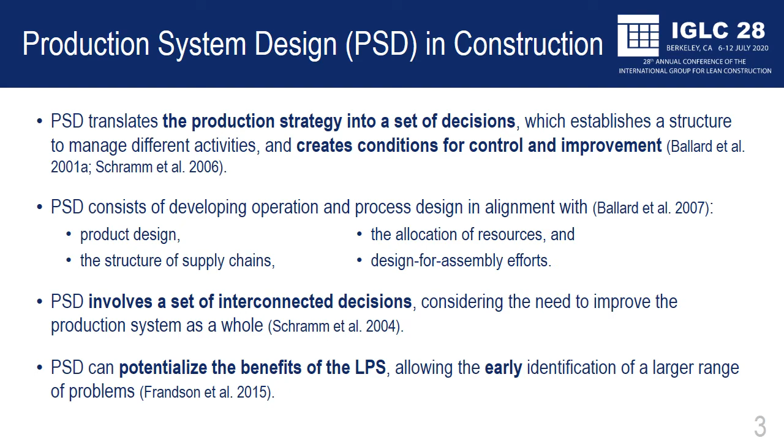This paper reports the experience of a construction company that has implemented production system design and the Last Planner System over 3 years. This work is part of an ongoing lean implementation program. The contributions of the paper are the definition of the scope and the potential benefits of the production system design, and the proposition of a set of practices that can be used along the production system design stages, with emphasis on location-based planning and control.

So, the implementation was divided into 3 main phases. In phase 1, for assessing the existing situation, an evaluation protocol was applied in 2 projects, and we also took other sources of evidence. We found out that the company did not have a systematic and explicit PSD. Also, we identified a lack of understanding of lean concepts and a large amount of work in progress.

Phase 2 was characterized by the development and testing of PSD and Last Planner System. During this phase, a lean training program was carried out. Also in phase 2, an evaluation of benefits was performed. As results, a lean supporting group was established, a decision category was included to emphasize layout and logistics, and some control tools were standardized. During phase 3, the LPS and PSD model were implemented in 5 new projects. After the implementation, the results were evaluated and the model refined. A lean workshop was organized to discuss and disseminate the benefits of implementing PSD.

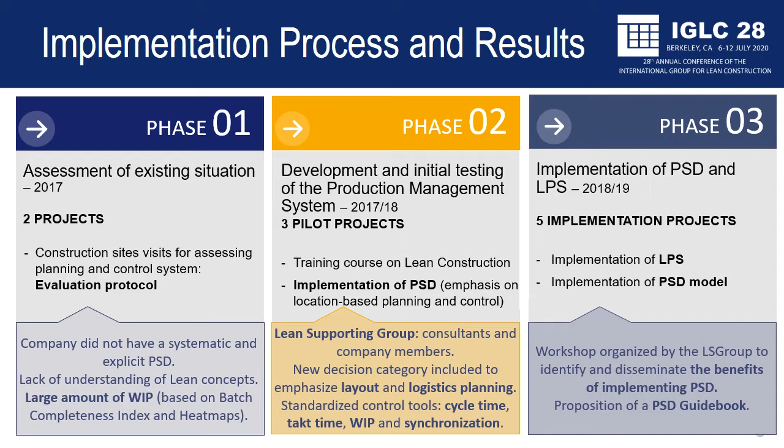The company's PSD model has 8 decision categories. The first 3 categories are related to the base unit, or repetitive batch. The other ones are related to the project as a whole. The PSD starts with the capture of stakeholders' requirements and definition of construction sequence. The second step is to define resources and production capacity. In these 2 steps, BIM can help gather information and communicate clearly the construction sequence.

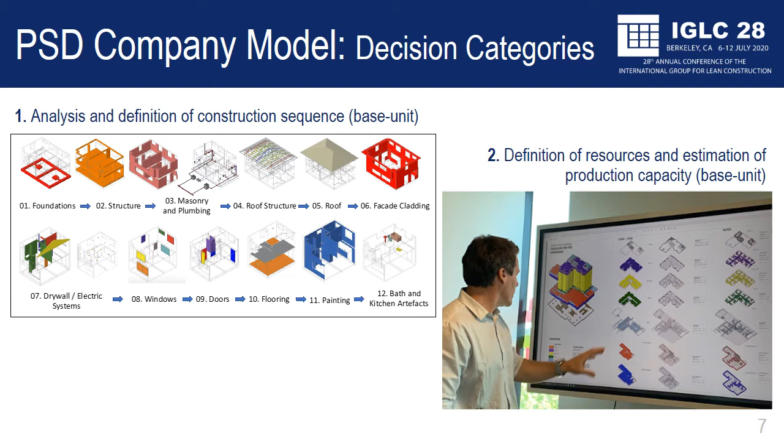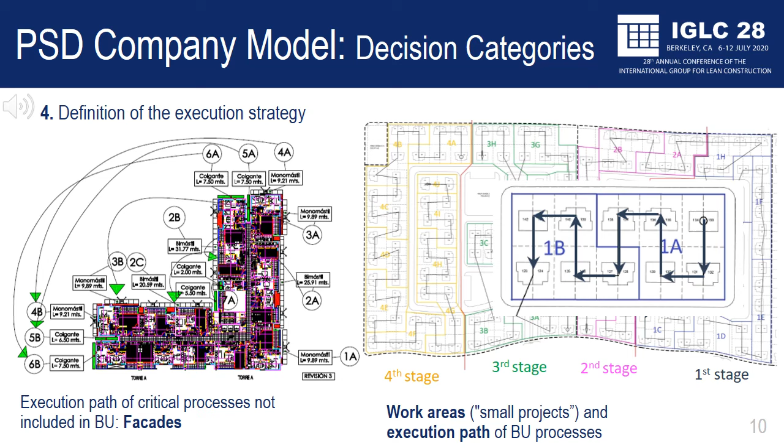The third decision category refers to the definition of workflows. It may be necessary to make a trade-off analysis between product flow and workflow. The definition of workflows may require a review in the previous steps. Categories 4, 5, and 6 present a higher interaction. It begins with the definition of the execution strategy. Here the goal is to divide the project into small work areas, establishing a location-based system, and to define the execution path for base unit processes and critical processes not included in the base unit.

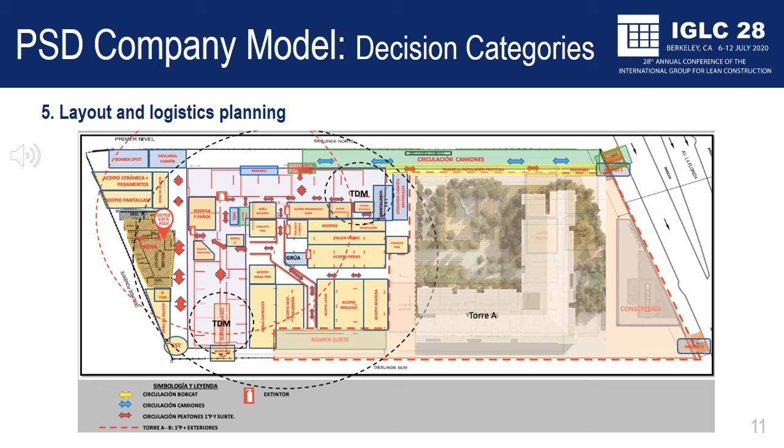The decision category 5 provides a deeper analysis of layout and logistics. More than defining construction facilities, it's important to analyze and simulate where and how the flows will take place. In the 6th category, the first version of line of balance will be developed. During this step, it's important to balance the cycle time of the processes based on takt time. It's also important to set buffers to decouple processes with high level of uncertainty and variability, as shown in the example.

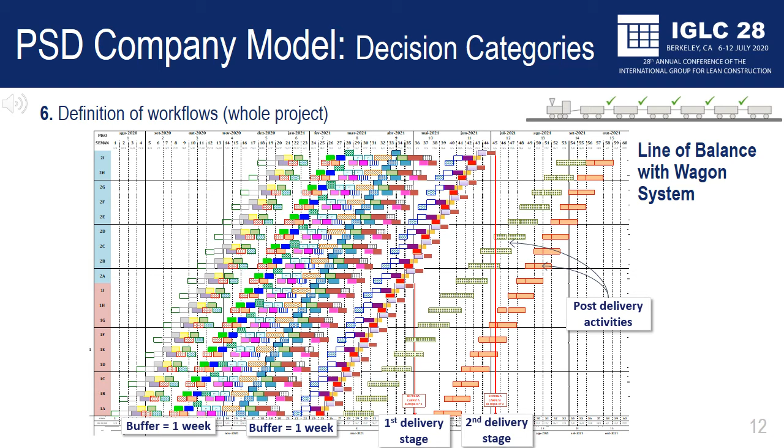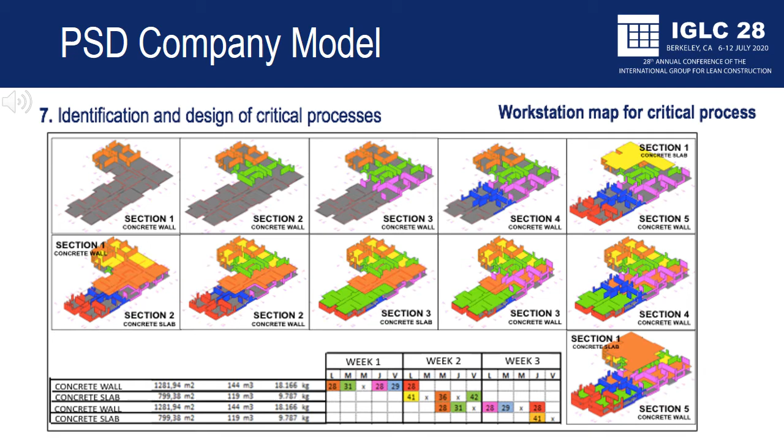There are some critical processes that may limit the system capacity. Those processes need a close look in order to anticipate problems and reduce uncertainty. Here we have an example of a workstation map for concrete structure that shows in a transparent way the result of the design for a critical process. The last step is to perform a review of the previous categories. Based on the decisions taken in the design of critical processes, some changes may be necessary.

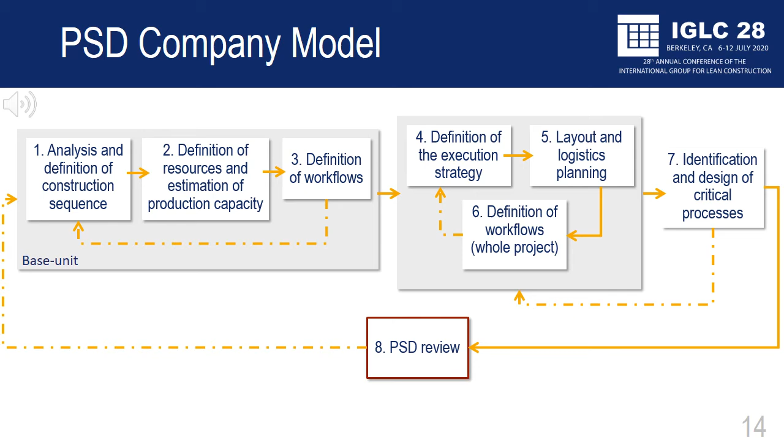At the end of Phase 3, 6 main benefits were identified through a lean workshop. The first 2 benefits are a consequence of the early involvement of stakeholders in pre-construction phases. The use of data and the experience of different stakeholders helped to make decisions explicit and reduce uncertainty during the construction phase. Still, PSD helped improve planning accuracy by exploring multiple alternatives of construction systems and subsystems. Planning accuracy was monitored during the construction stage by batch adherence control. PSD also facilitated the adoption of cycle time and takt time control.

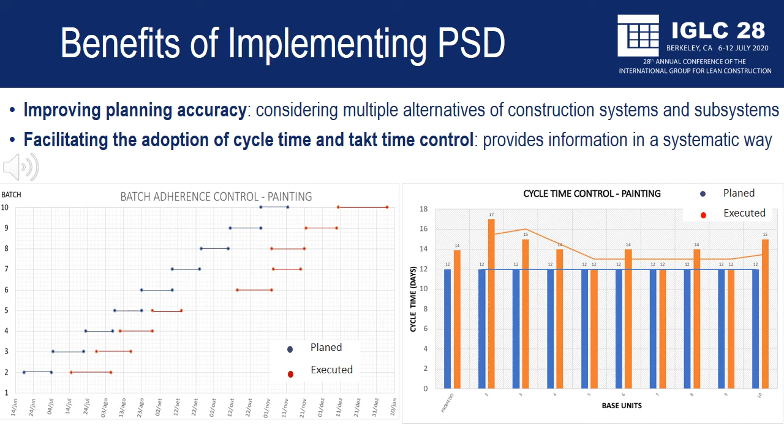In addition, stakeholders that participated in the PSD decisions became more engaged with the Last Planner System, and the projects improved production stability. Last Planner metrics and the sequence of work in progress control were used to monitor these benefits.

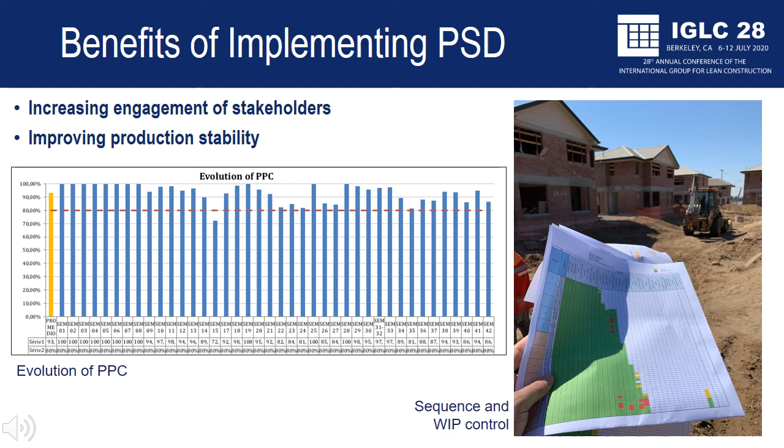So, for conclusions, we have compared the proposed PSD model with previous studies. Differently from other studies, the proposed PSD model was tested and implemented on several residential projects in a systematic way. It also provides more emphasis on location-based planning and control, layout and logistics studies during pre-construction stages. The proposed PSD advances in terms of cycle time, takt time, work in progress, and synchronization analysis before construction. It generates information concerning the production system as a whole. It also produces a set of standardized tools to be used to monitor the implementation of PSD.

Also, data have been collected by the research team, and in the near future, the main results achieved will be systematically reported. It is important to highlight that although PSD requires a collaborative effort in the pre-construction stages, the proposed model does not seek to increase the level of detail of decisions in those stages. In other words, it does not conflict with the adoption of different hierarchical planning levels proposed by LPS.